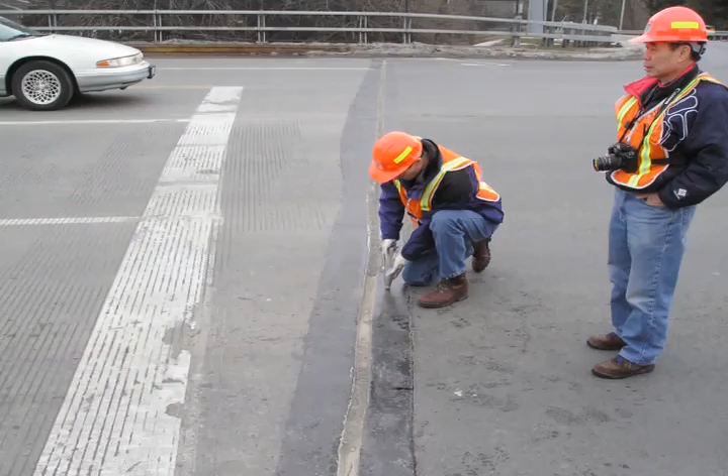Here we're conducting a test on a bridge in New York. The gentleman standing with me is Daniel Hsiao, also a BYU graduate, who is a senior project manager with the Utah Department of Transportation and also the director of the project, which I will share with you at the end of this presentation.

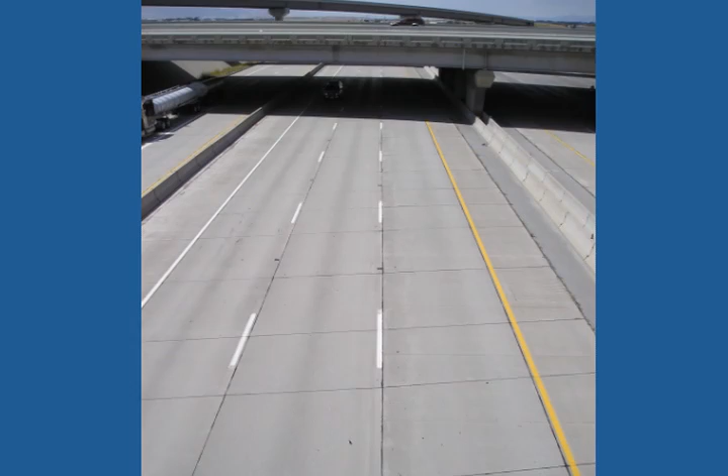Here's a picture of a typical bridge deck. The deck itself is about 8 inches in thickness, and it contains 2 mats, or layers of reinforcing steel, or rebar. Each mat is about 2.5 inches from the top and bottom of the bridge deck. Over time, bridge decks deteriorate. They deteriorate due to traffic factors, environmental effects, material property deficiencies, and other factors.

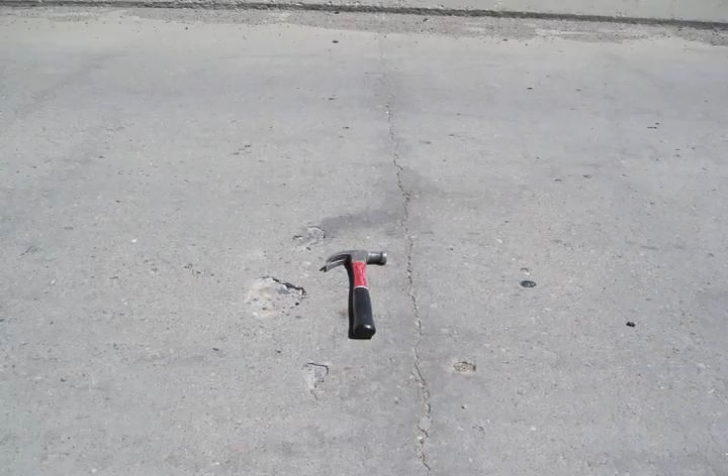Here's a picture of a typical distress, in fact, the most common type of distress that we see in bridge decks. This is a transverse crack adjacent to the hammer shown in the picture. This crack, like many types of distresses, can be seen with the naked eye. It can be measured and quantified and reported as part of a visual distress survey.

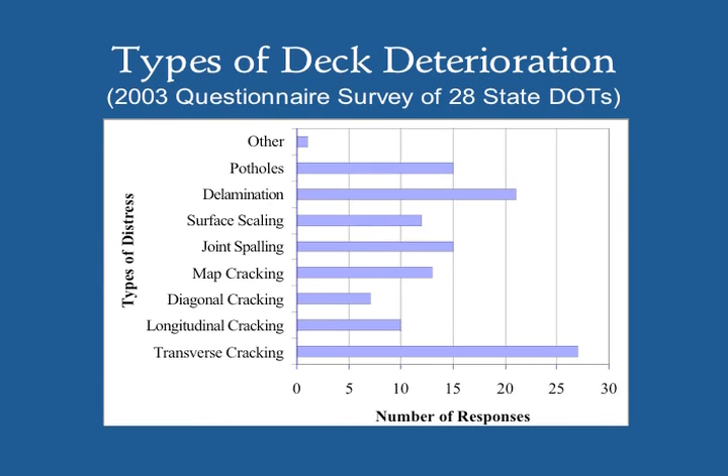Other types of distress common on bridge decks are shown in this slide, which is the result of a 2003 questionnaire that my previous student, John Hema, performed of 28 state departments of transportation across the northern tier of the United States. We see that, as I mentioned earlier, transverse cracking is most common, followed though by delamination.

Delamination is a type of distress not visible from the pavement surface. This is a subsurface detachment of the concrete just above the top reinforcing steel from the underlying concrete substrate below the reinforcing steel. Delamination, while it cannot be seen visually, can be detected using acoustical sounding, including chaining.

I'd like to show you a brief video clip that documents 3 different ways by which we can see delaminations. I'd like you in the video to pay particular attention to the areas which are hollow or sound dull. Those correspond with the delaminations.

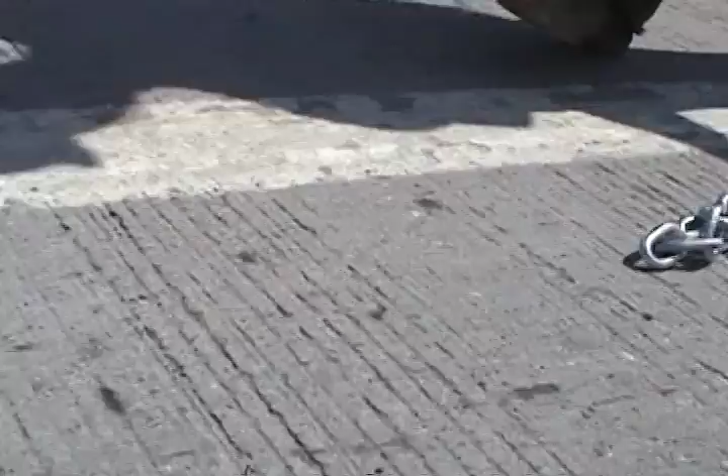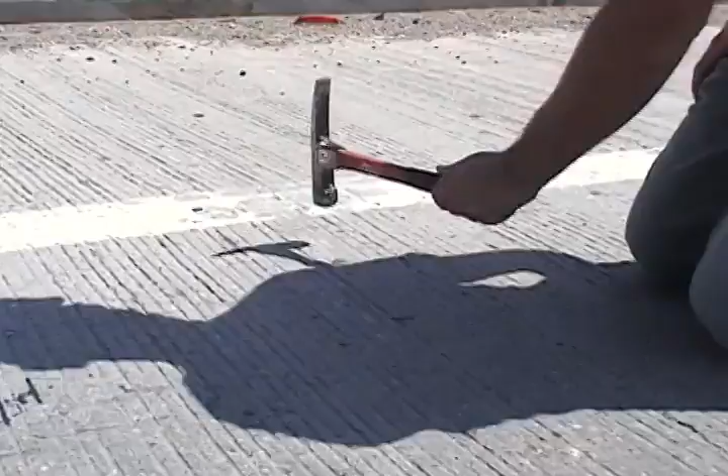Okay, another time. Ooh, that wasn't bad. Come back. One more time. Okay, again. That's pretty good. Yeah, real firm.

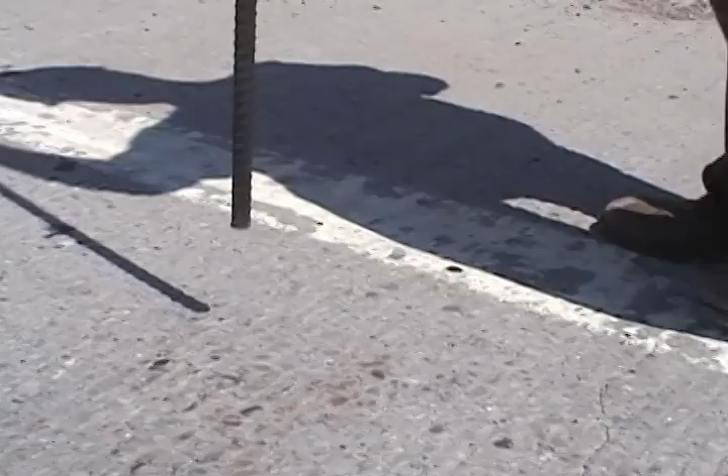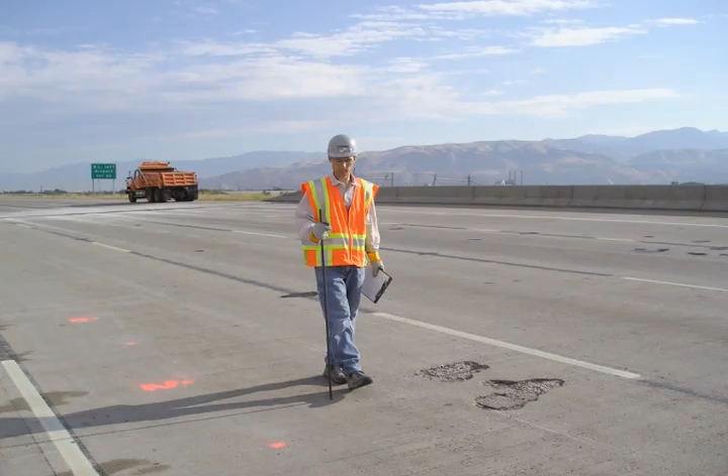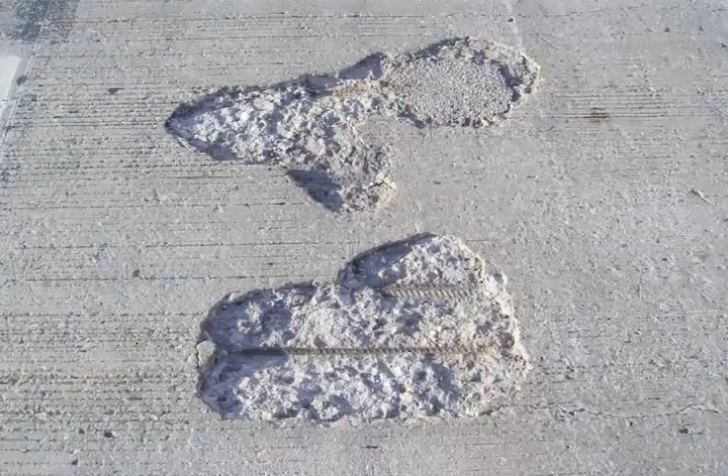Okay, come back. All right, could you hear the hollow sound as the chain especially was dragged across the surface of the concrete deck? Over time, those delaminations will manifest themselves at the surface through the occurrence of potholes, as shown on this bridge deck surface. As we zoom in, we can see clearly the top layer of reinforcing steel, or rebar, present in the bottom of the potholes. Over time, as the deterioration continues, these grow.

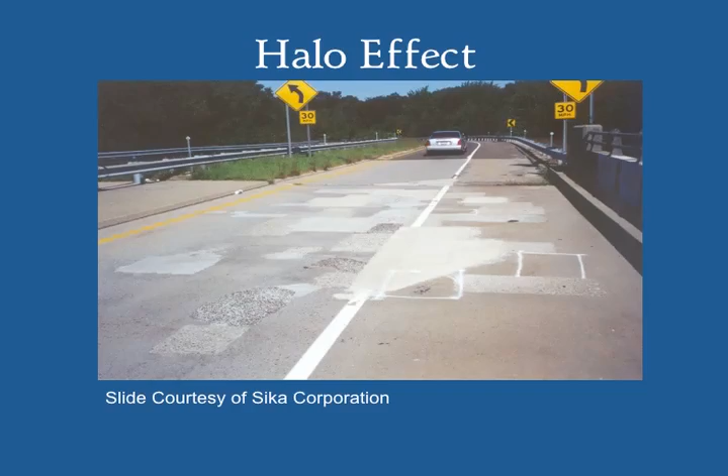This effect, this growing effect, is called the halo effect, and I'll speak more about it later in the presentation. As you can surmise, with increasing deterioration and increasing patchwork, the structural integrity of the deck is compromised. I'd like to share with you some condition data for Utah bridges in particular.

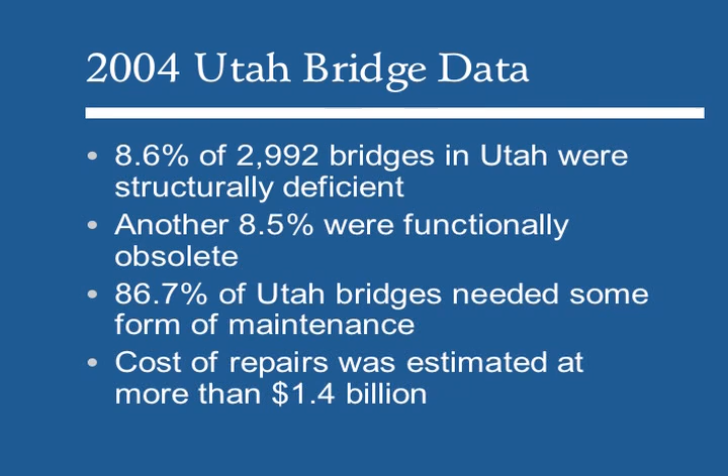In 2004, 8.6% of the nearly 3,000 bridges in Utah were structurally deficient. Another 8.5% were functionally obsolete. And nearly 90% of Utah bridges needed some form of maintenance. The cost of the repairs was estimated at more than $1.4 billion.

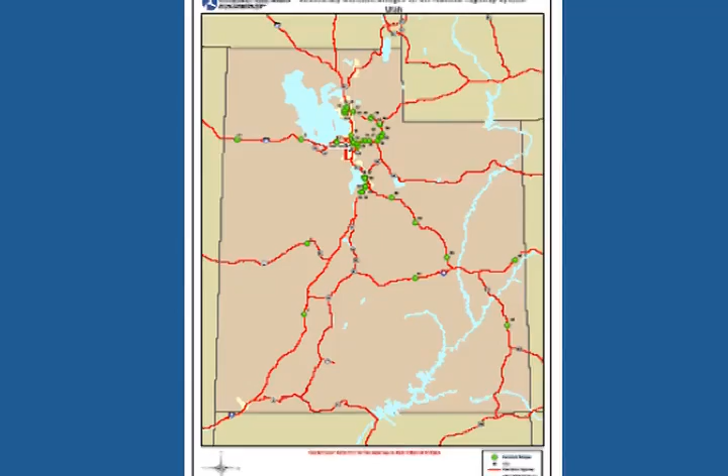Now, I suspect that some of you are interested to know the exact locations of these structurally deficient bridges. They are represented in this slide as the green dots across the state of Utah. Those are structurally deficient. State departments of transportation across the nation, like Utah, are facing this problem.

What, you might ask, is the root cause of the deterioration of concrete bridge decks in the northern tier, such as in the state of Utah? We asked this question in our questionnaire survey conducted in 2003, and we learned that salt-induced corrosion of reinforcing steel is the #1 leading cause of bridge deck deterioration. Answers in the other category were varied, but predominantly addressed construction aspects.

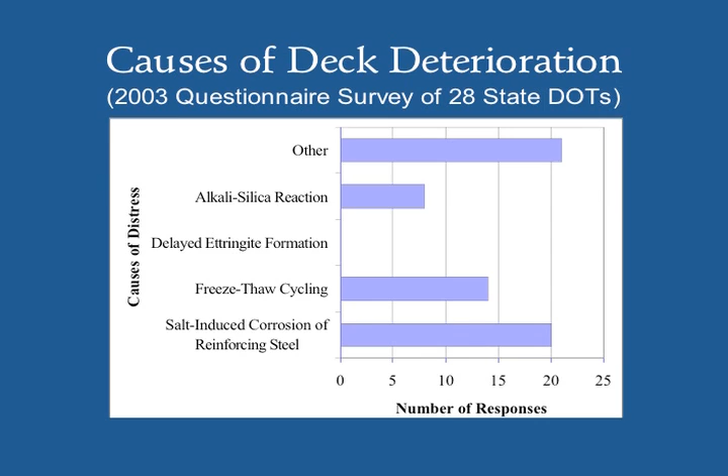Let's talk a little about salt and corrosion. Safety is the #1 parameter in all engineering aspects, and when drivers apply the brakes, they need to be able to stop. Because bridges are elevated structures, they cool from both the top and the bottom of the slab. Therefore, they can freeze rapidly compared to a pavement structure which is situated on the ground. Consequently, bridges have huge potential for severe icing problems.

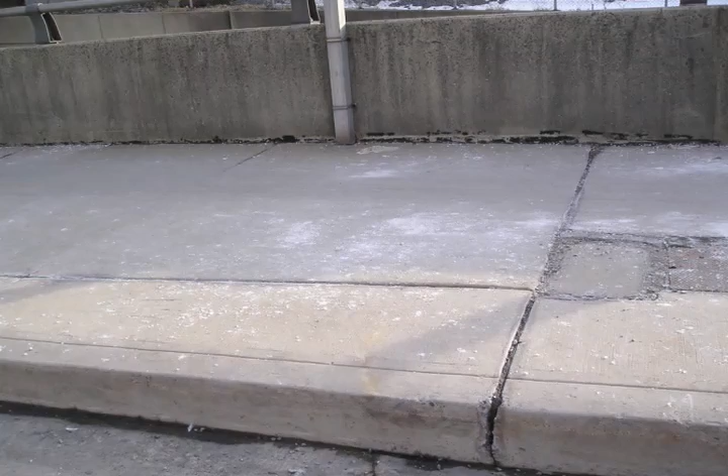To combat the otherwise slippery condition, departments of transportation routinely apply de-icing salts on our highway bridges and roadways to reduce the effect of icing. Here's a picture of the salt that's accumulated on a bridge in New York. And to give you some idea about our application rates in Utah, we apply about 250 pounds of salt per lane mile with each de-icing event.

So to put this in perspective, to treat the entire length of University Avenue here in Provo and Orem, we would need 15,000 pounds of de-icing salt with each event. Now, surely you must be asking, where does all of this salt end up? Well, some of it is splashed up onto our vehicles and carried other places. Some of it is caught in drains and outlet boxes on the bridges.

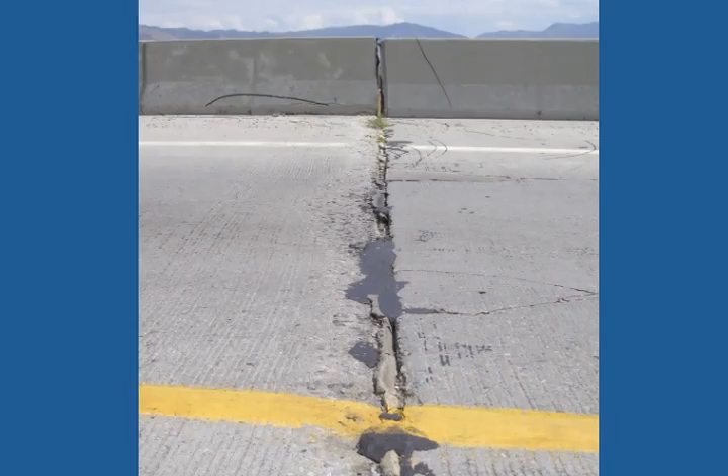Some of it, unfortunately, goes through leaky joints like this one, and the salt ends up corroding the substructure of the bridge. This is a local facility, by the way. And ultimately, some of it ends up in the concrete itself through a process called diffusion.

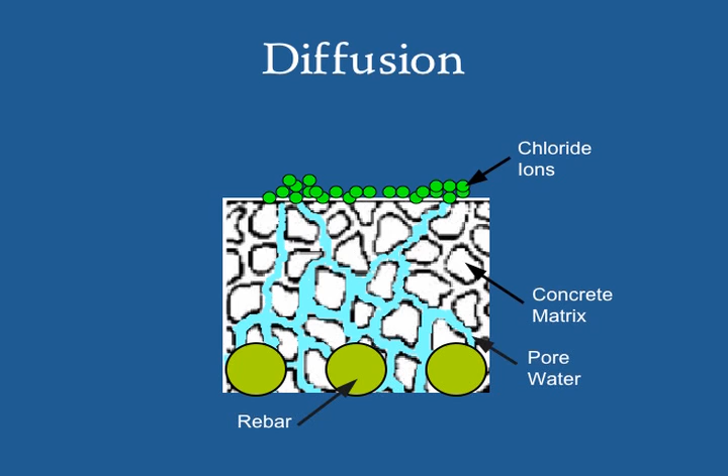Concrete has an internal void structure, which in most cases is at least 90% saturated. The concrete pore water provides a pathway for the chloride ions to enter the deck. As the ions approach the rebar, they can then cause corrosion of the reinforcing steel. Now, when the sodium chloride dissociates or dissolves in water, it produces a sodium ion and a chloride ion. The chloride ion is the one of greatest interest.

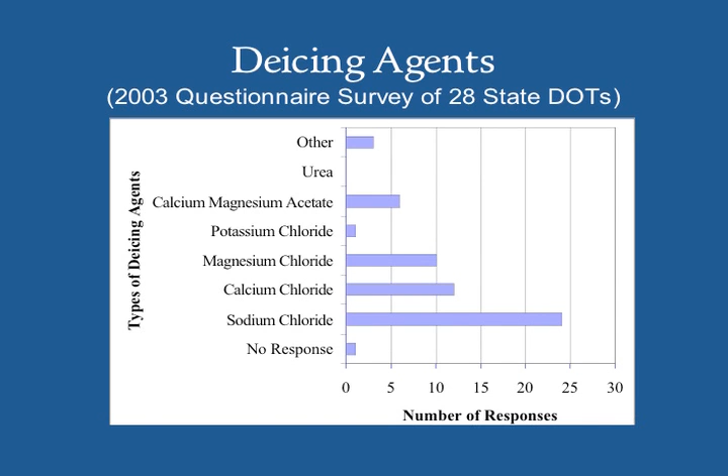I've shown you here the types of de-icing salts that are most commonly used. You see sodium chloride is by far the most common, and we have a huge abundance of this right near the Great Salt Lake in Utah. Other types of de-icing salts include potassium, magnesium, and calcium chlorides, all chloride-bearing. In some cases, calcium magnesium acetate is used. It's used especially in environmentally sensitive areas, but it is quite expensive. So we continue to use sodium chloride.

This schematic, courtesy of the Sika Corporation, gives us a picture of the 4 components of the corrosion circuit, namely a cathode and anode and electrolytic path, which is provided by the pore water, and a metallic path, which is the steel itself. As chloride concentrations increase around the rebar compared to other locations, that location becomes the anode, and that's where the actual corrosion occurs. Because rust itself is 500 to 700% larger in volume than the parent material, it produces a bursting stress within the concrete.

Concrete is not good in tension. In fact, its tensile strength is approximately 1/10 that of its compressive strength. And so cracking, initially horizontal cracking and then vertical cracking, occur quite readily, and then soon we have the birth of a pothole. Another consequence of rust is the reduction in the cross-sectional area of the steel, which ultimately leads to a reduction in the load-bearing capacity of the bridge deck.

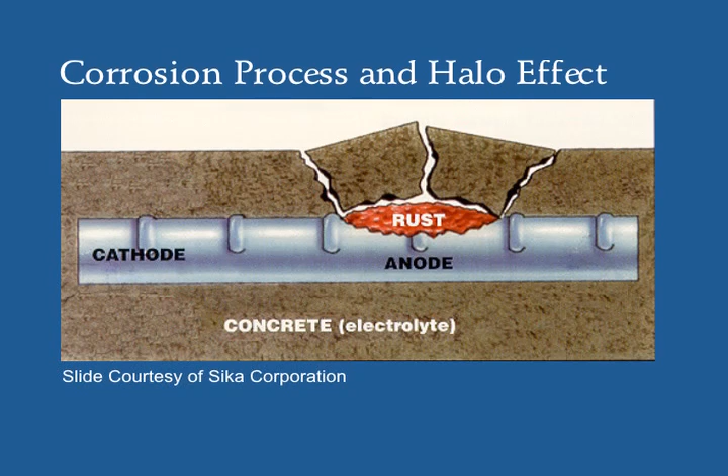After a while, the maintenance forces will come along and finally replace this deteriorated concrete. They'll replace it with chloride-free concrete in this patch, and then subsequently, this part of the system, previously the cathode, will become the anode, now having greater chloride concentrations than its adjacent steel. And now the corrosion process will be initiated at this location. Thus, you see how the halo effect occurs in the field, a continuous growing of this damage process.

Now, what can be done to stop this corrosion or to retard it? The first thing that DOTs have to consider that I'm going to share with you is increasing the cover depth. This typically ranges between 2 and 3 inches, although I've seen it as low as 1 on some bridges here in Utah. By increasing the thickness of the cover, even 1/2 inch, we can improve the service life of the deck up to an additional 6 years.

So, for example, increasing the thickness from 2 inches to 3 inches for decks similar to those that we tested will provide a 12-year increase in service life. We've simply delayed the arrival of chlorides at the level of the reinforcing steel. However, after that 12 years has elapsed, now the chlorides are again arriving in critical concentrations at the level of the steel. What can be done then?

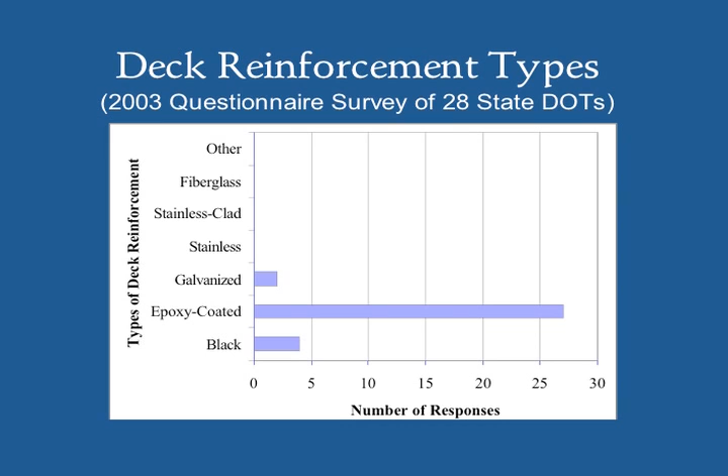To answer this question, let's talk about the type of reinforcement that's available. Again, these are results from the questionnaire survey of several state DOTs. You see that many DOTs use epoxy-coated rebar. This is commonly recognized by its green color. As long as the epoxy coating is intact, that is, no defects, no holes, no scrapes, the epoxy will prevent the chlorides from coming into direct contact with the steel and thus prevent corrosion altogether.

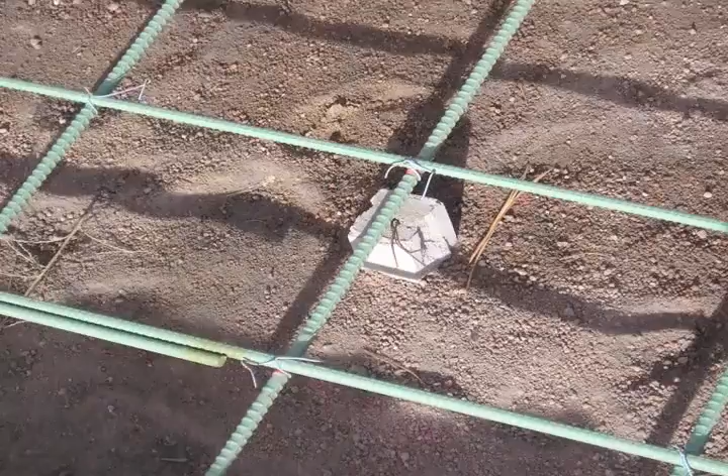However, for this to be successful, all parties involved with transportation, handling, and placement of this must be careful. And even with field cuts, such as is shown here, an epoxy compound patch must be applied to prevent localized corrosion at that location and ultimately shearing of the bar.

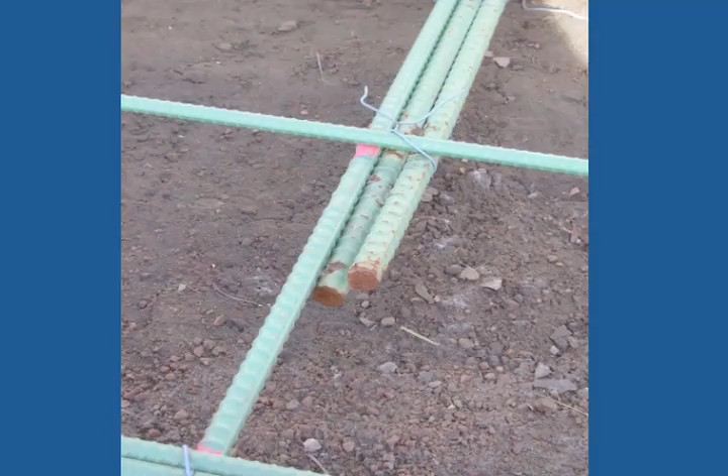Unfortunately, though, in too many cases, proper handling techniques are not utilized, and in fact, the ribs of the rebar are scraped. As the workers strike the tie wires down, they strike the epoxy coating of bars beneath, causing dings and other defects in the epoxy coating, and in many cases, the bar begins corroding even before the concrete is cast around it.

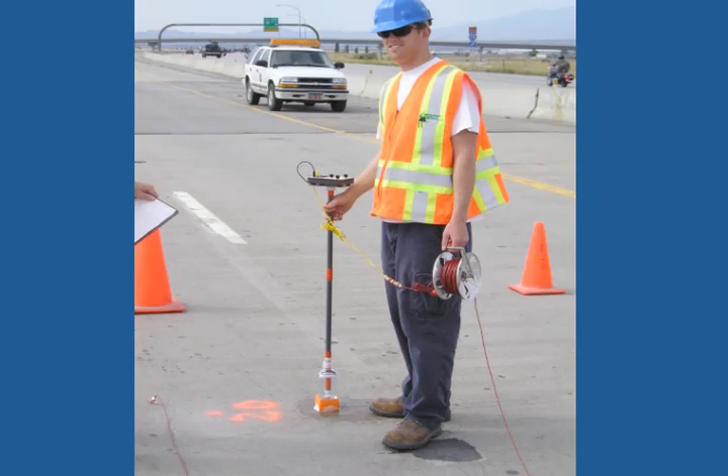In fact, in our field testing, we found that approximately half of the decks that we tested, which were known to have epoxy coatings, did not exhibit the properties of protection that we expected. In fact, they were as though no epoxy coating was present. This is unfortunate, but it emphasizes the importance of proper construction.

Bridges typically have a design life of 50 years, but a bridge will only last that long if it receives proper maintenance. One way UDOT hopes to extend the life of Utah's bridges is by applying an epoxy to the surface. This film is intended to document this preventative maintenance performed on the ramp connecting northbound I-15 to State Road 201 in September of 2004. This ramp was built during the I-15 expansion project just prior to the 2002 Winter Olympics.

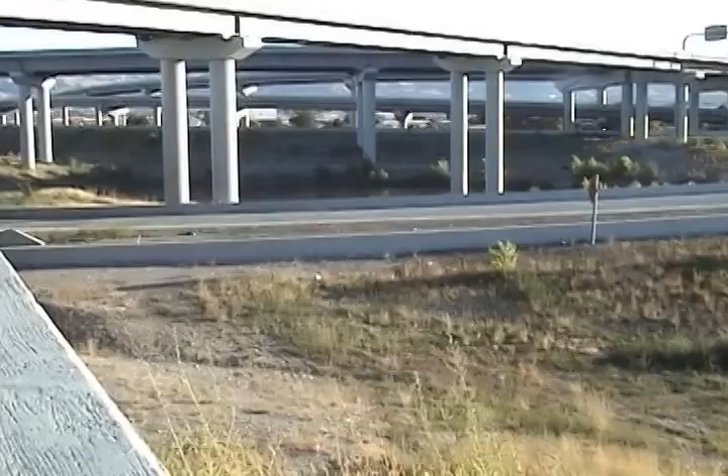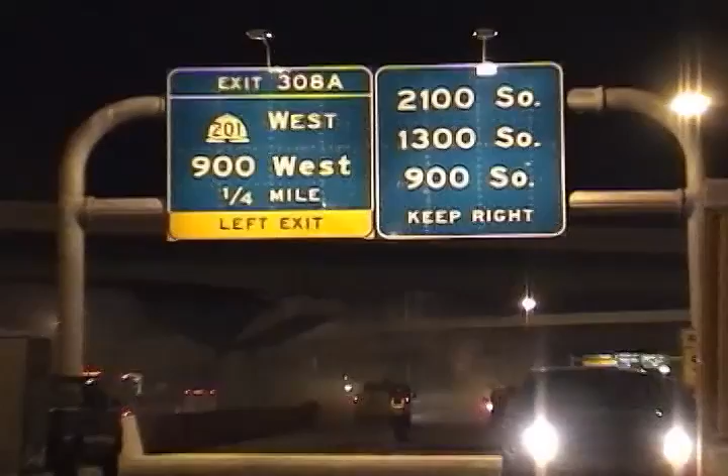For this project, Granite Construction is working with Polycarb Incorporated to apply 100,000 square feet of Flexogrid. Flexogrid is an epoxy-based polymer concrete designed to protect concrete from the damaging effects of traffic and especially de-icing salts. If salts are allowed to penetrate the bridge deck surface, they will cause corrosion of the reinforcing steel, which leads to bursting stresses and cracking as well as strength reduction.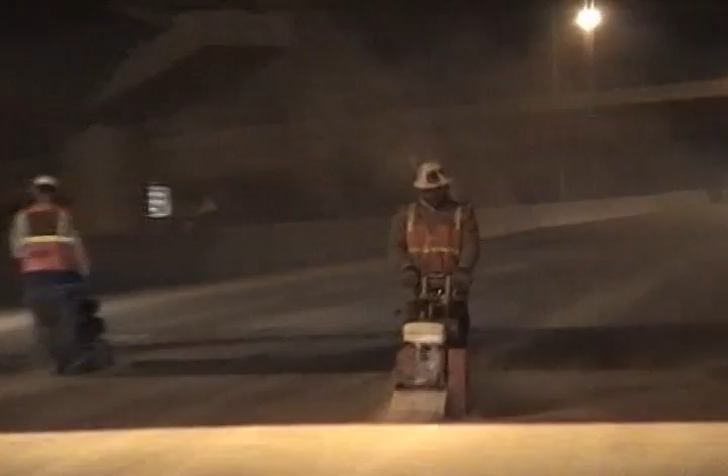Before any overlay materials can be placed, the surface must be prepared. The tremendous strength of the epoxy is wasted if it is bonded to a layer of paint, deteriorated concrete, loose debris, or any other substance that should have been removed prior to application. Failing to properly clean the surface contributes to the occurrence of delamination and blistering, which lead quickly to cracking.

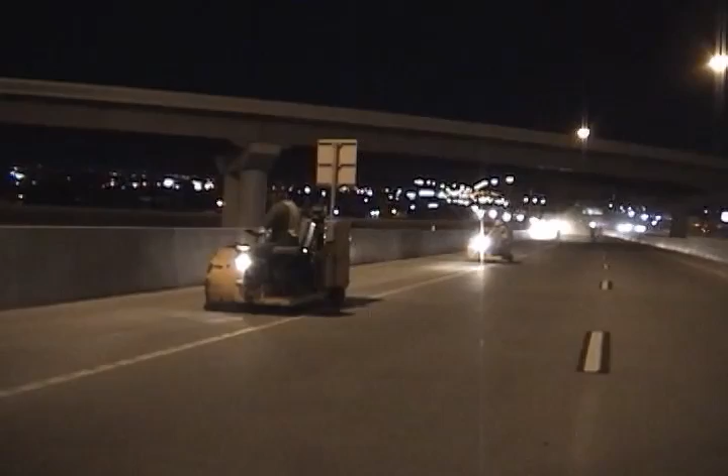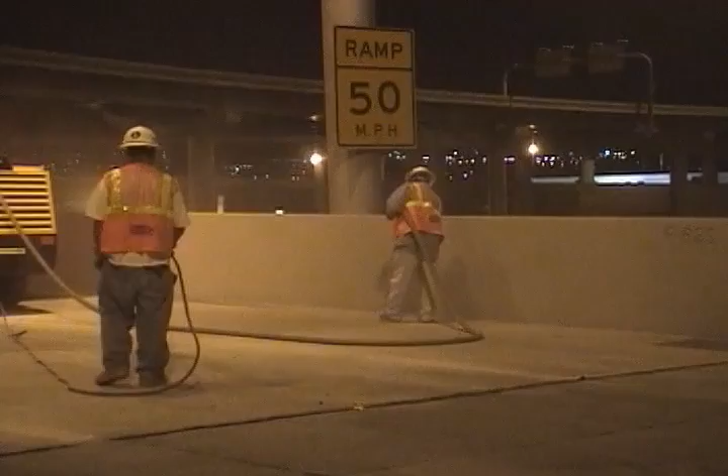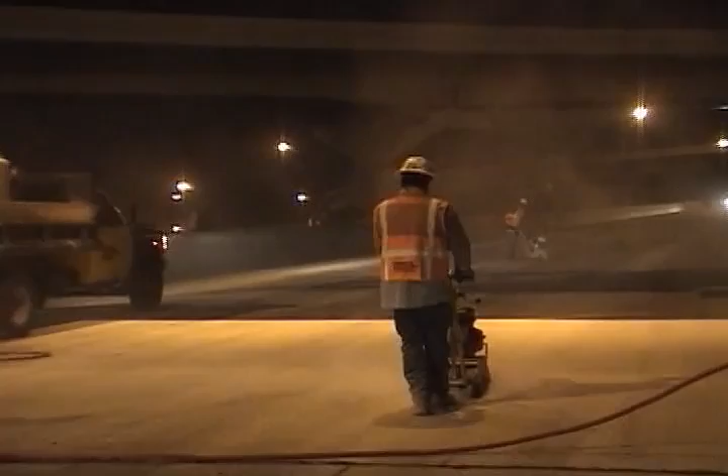The edges are inaccessible to the shot blasting machines, so handheld sandblasting hoses are used to clean these areas. Grinding machines are used to scrape the painted lines off the surface. Once all the blasting is complete, the deck will be cleaned with a vacuum truck to ensure no sandblasting grit or steel shot is left on the deck. Once the deck is cleaned, the drainage grates and expansion joints must be covered, or they will be filled with epoxy, potentially rendered unusable.

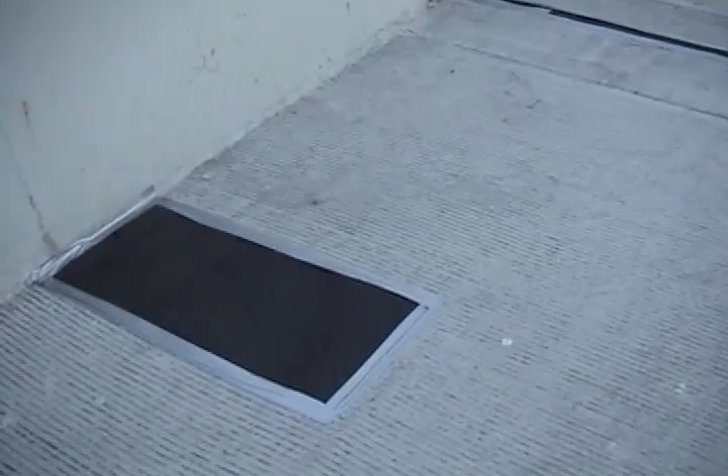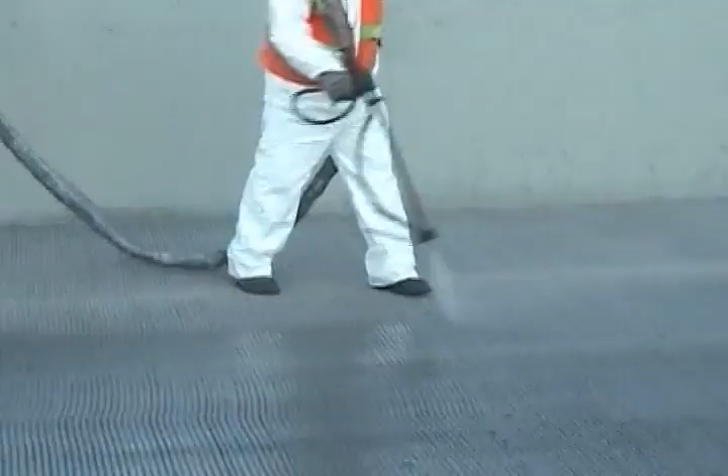The final stage of deck preparation entails the application of a low-viscosity methacrylate. This material is intended to penetrate and seal the small cracks that have formed in the concrete in the years since its construction. Once the cracks have been sealed, the deck is ready to receive the Flexogrid overlay.

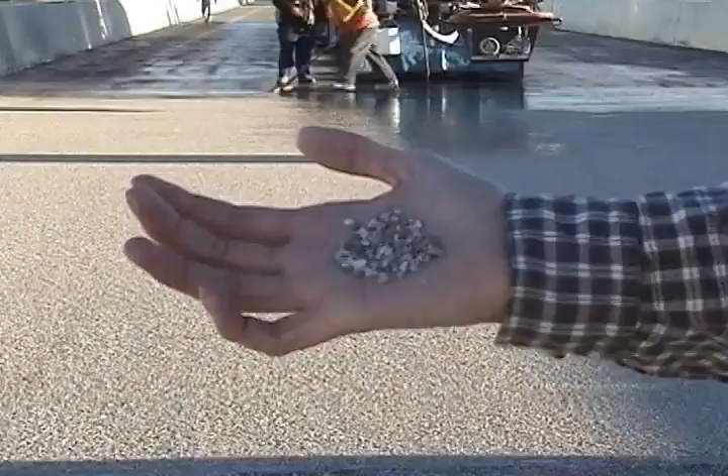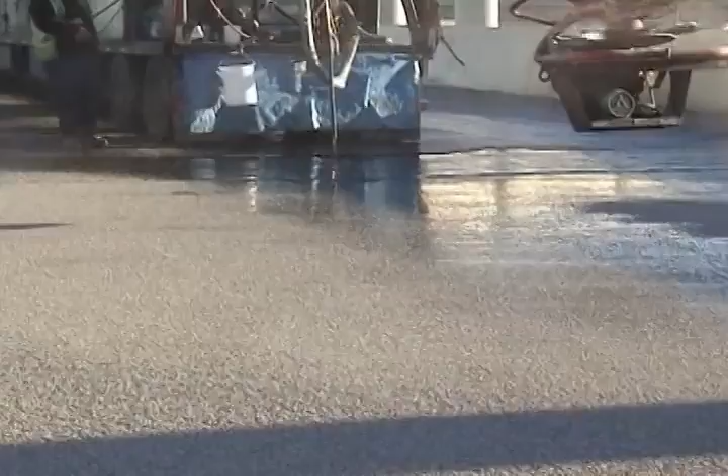The Flexogrid is automatically mixed in the Polycarb trailer and dispensed onto the deck surface at about 100 degrees Fahrenheit. Heating the epoxy greatly increases the speed at which it will cure. Once the Flexogrid binder hits the deck, it is immediately spread onto the deck surface using squeegees and showered with aggregates. When this layer of epoxy and aggregates has hardened, the loose material is removed and a second layer of binder and aggregates is applied. The two layers combined will have a thickness of around 5/8 of an inch.

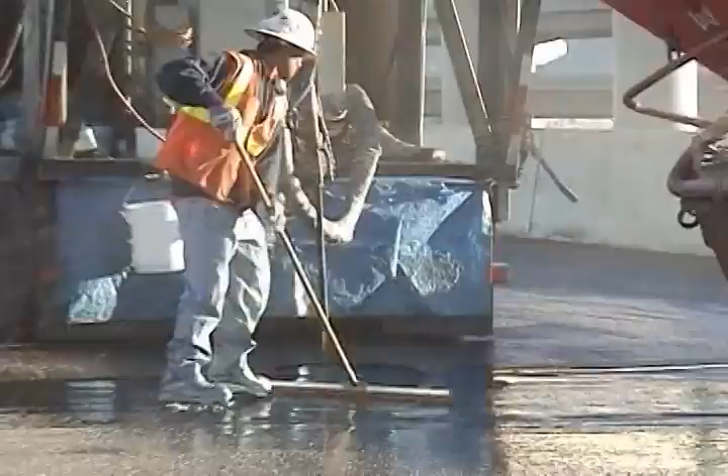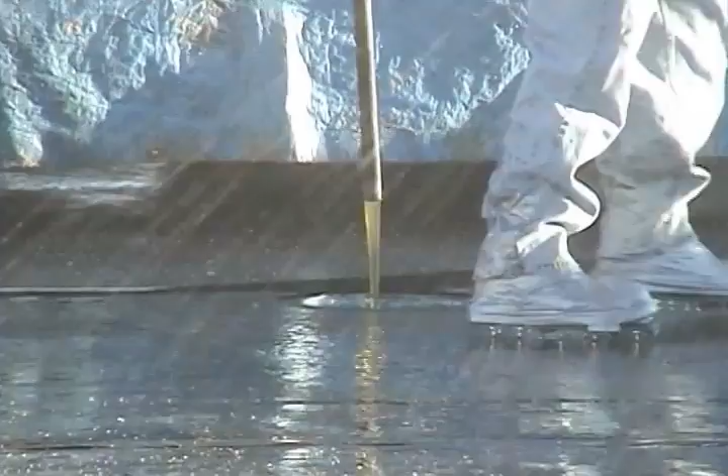Eric Wells of Granite Construction explains some of the reasoning behind choosing to overlay the deck with Flexogrid. Polymer concrete overlays can be installed and ready to receive traffic much faster than concrete overlays, and with much less additional dead load being added to the bridge. This fast turnaround reduces the amount of time the bridge must be closed and goes a long way to justify the increased cost of materials associated with polymer concrete. In this case, the cost was about $4.10 per square foot.

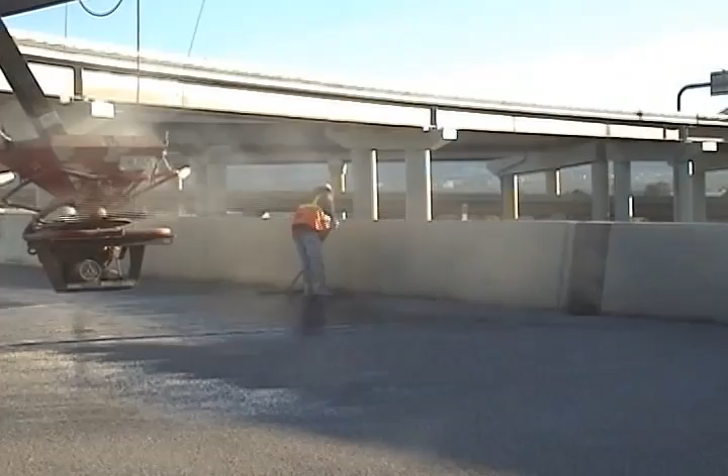To put this quick turnaround time in perspective, under favorable conditions, Flexogrid will cure in 4 hours, while a standard 2-inch concrete overlay takes 7 days to fully cure. Polycarb is the only company that Mr. Wells is aware of that uses a trailer to automatically mix and dispense the chemicals and aggregates used in the overlay. The same process performed by another company could take considerably more time, manpower, or both, because they involve using a trash can and drill to mix the polymer and bucket brigades to spread the material onto the deck. The heavy aggregates must then be carried out onto the bridge and dispersed by hand.

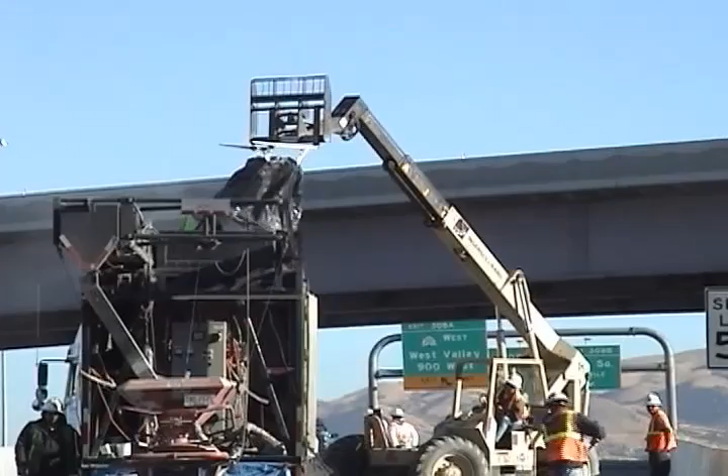Another benefit of using a trailer to carry materials is that reloading the trailer with aggregate is a fairly quick process. The aggregate is loaded into the trailer using a large forklift. Using the Polycarb wagon, 100,000 square feet of overlay can be applied to the deck, cure, and be open to traffic in less than 48 hours and can be expected to last in the neighborhood of 15 years with minimal maintenance. Mr. Wells also explained that in his experience, other overlay systems involving waterproofing rubberized membranes under a layer of asphalt can be expected to fail after 2 to 3 years of use.

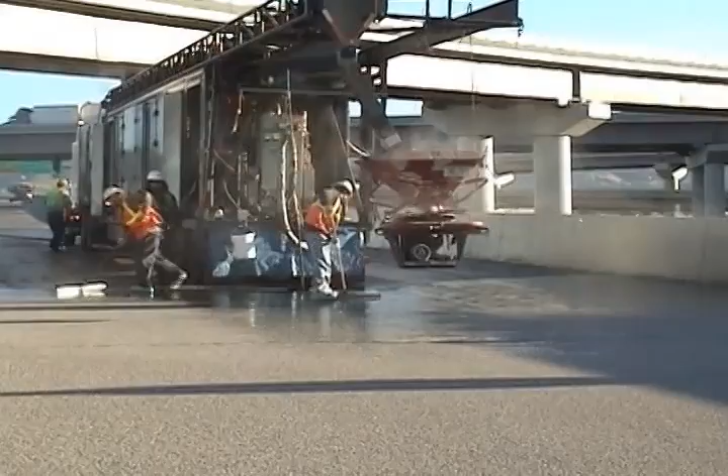Bruce Roeder, a chemical engineer for Polycarb, explained, in addition to most of the facts presented in this film, that this year alone Polycarb anticipates construction of 1 million square feet of overlay. This shot clearly contrasts a concrete pavement that has been overlaid with a concrete pavement that has not.

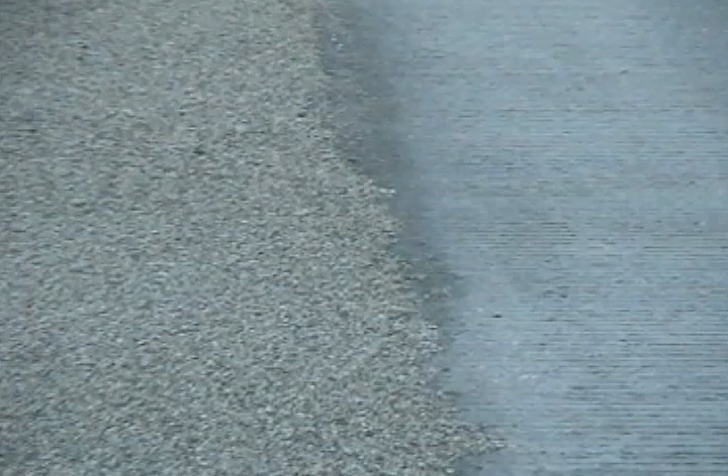Okay, from the video you learned that these surface treatments can last up to 15 years. In research that was performed by my student Amy Birdsall, we found that these surface treatments should be applied between 1 and 15 years after construction of the new deck. Otherwise, sufficient quantities of chlorides have already entered the deck, corrosion has already commenced, and the expenses associated with the epoxy overlay are of no value.

So, UDOT in particular has found great success in applying these within 1 year after new construction. By acting quickly, they dramatically reduce the exposure of these new decks to these aggressive chloride ions. Ultimately, though, unless the surface treatment is restored, replaced, or repaired, chloride ions will again begin entering the concrete. And when they do, ultimately the bridge deck will require some form of maintenance, rehabilitation, or replacement.

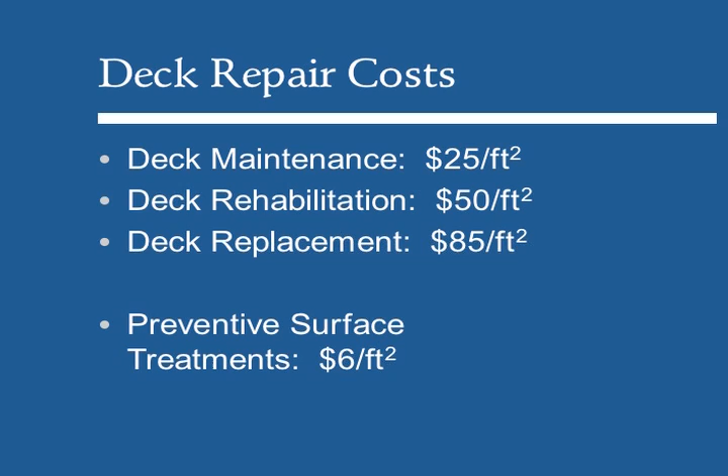These are costs associated with these activities here in the state of Utah. The cost for preventive surface treatments at $6 a square foot is only a fourth that of minor maintenance activities in the deck maintenance category. Notice again that those costs are a third to a fourth that associated with deck replacement. So an efficient bridge deck management program will focus on preventive maintenance.

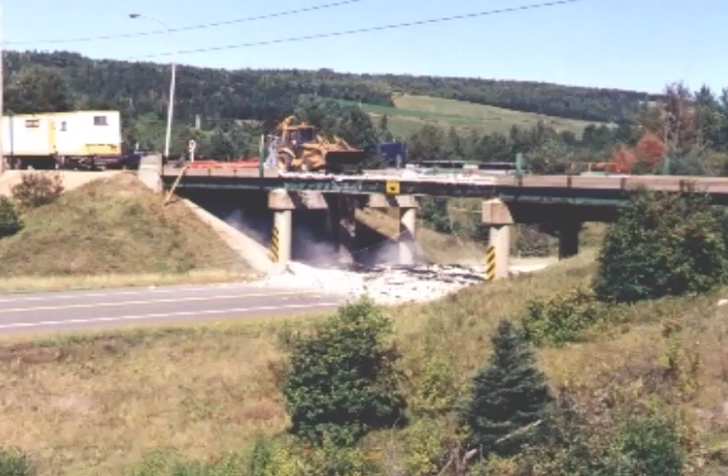Finally, when repairs are required, inevitably the bridges are closed. Not only does the agency repairing the bridge incur specific costs, but the public also incurs real costs. The drivers who would otherwise frequent these corridors must now drive in a delayed fashion down detours, consuming more fuel, spending more time, putting more miles on their vehicles. These things add up to real costs. We call them user costs, and a progressive-minded DOT will consider the amount of user costs when selecting a particular strategy for maintenance, rehabilitation, or replacement of a bridge deck.

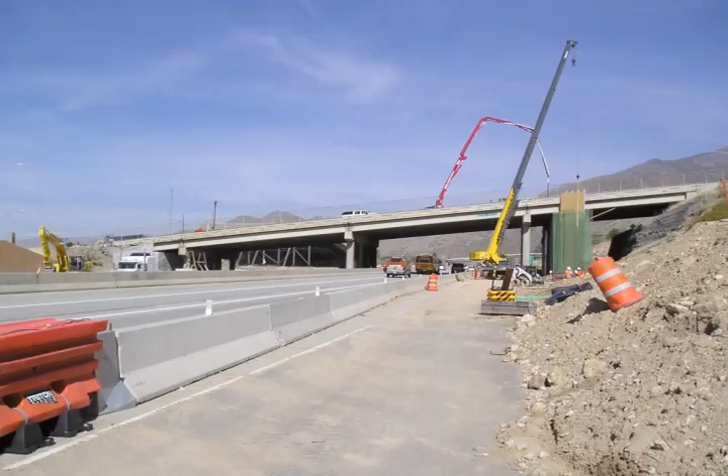I'd like to share with you a particular project where UDOT decided to pay a little bit more money up front to nearly completely eliminate the user costs associated with this project. This is 4500 South on I-215 East in Salt Lake City. This bridge will be removed and replaced this weekend. That's right, ladies and gentlemen. In 2 days, this bridge will be removed and a brand new bridge deck will be installed in its place using accelerated bridge construction technologies.

Traditionally, construction would require between 5 and 9 months. During that period of time, the bridge deck would be closed. The frontage roads that face the bridge would be affected. Traffic in the whole region would be adversely affected. You might ask, what is the user cost associated with this particular intersection? UDOT engineers computed it to be $33,500 per day, which is about $1 million per month. So, I'd like now to show you another video describing how the use of accelerated bridge construction saved us, the public, between $5 and $9 million on this project.

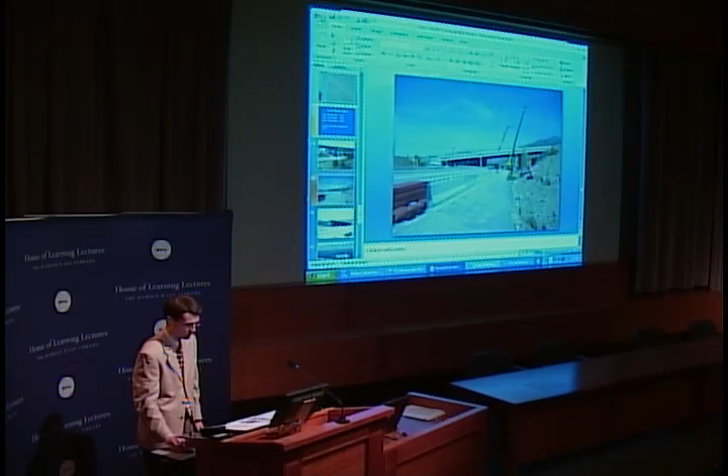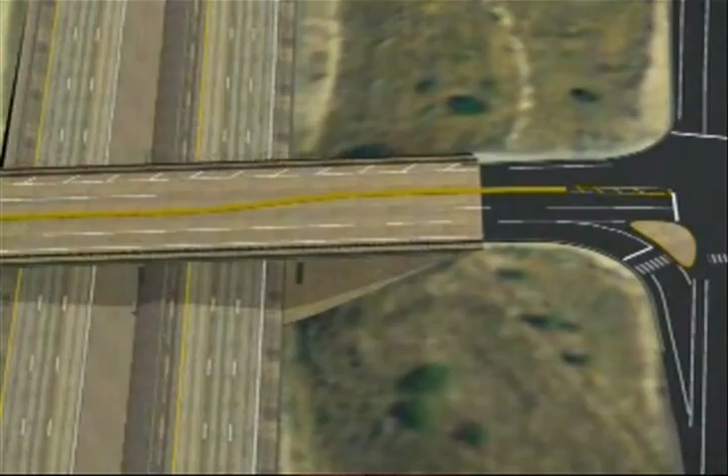Nestled in the scenic Wasatch Front, the 4500 South Bridge over I-215 East is being replaced using an innovative process called Accelerated Bridge Construction, or ABC, which allows for the building of a new bridge in a staging area until it is moved into place. The existing bridge is old and is being replaced with a single-span bridge that is the same size as the current one. Vehicles will continue to use 4500 South and I-215 while the new bridge and abutments are being built. The abutments, as seen from 215, will contain artistic reliefs, helping the new structure to blend in with its picturesque surroundings. During excavation, soil nail walls are used to stabilize the west and east sides while traffic moves overhead.

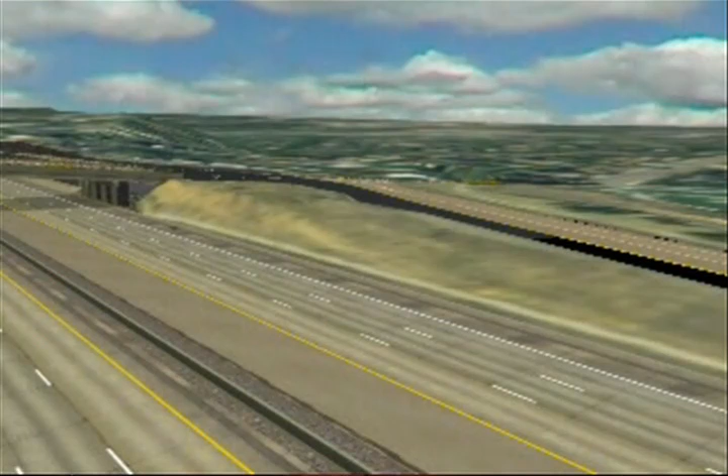The staging area is located between the interstate and the southbound off-ramp to 4500 South in what is known as the Ramp Gore area. The lower portion is graded to match the elevation of the southbound I-215 roadway, and the higher portion matches the elevation of northbound I-215. Temporary abutments are erected to allow construction of the superstructure, which is the primary support for the new bridge. Steel plate girders are laid across the temporary abutments, and then a cast-in-place deck is placed on the girders, along with integral end diaphragms. The completed 5-lane bridge weighs 3 million pounds, is 172 feet long, and rests on a 12% slope.

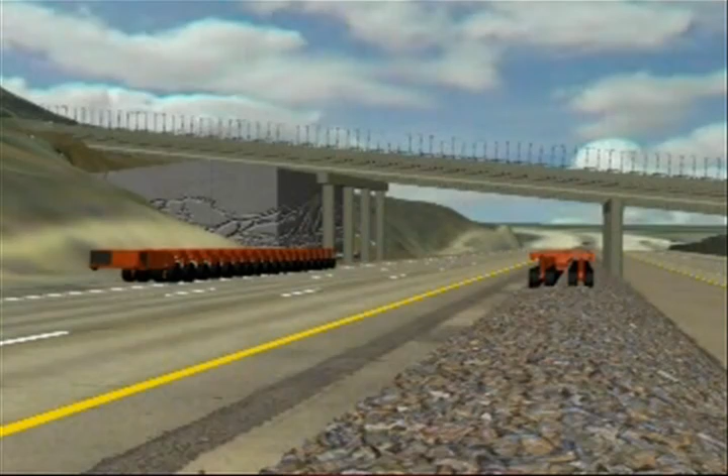A self-leveling trailer with multiple axles and wheels called a self-propelled modular transporter, or SPMT, is used to remove the old spans and move in the new one. Freight containers fill the gap between the trailer and the bridge bottom. The SPMT is controlled by remote control as the operator walks along with the trailer. Once under the northbound deck, the operator backs the SPMT out and carries the span to a demolition area. The special demolition area is located just beyond the staging area, and all demolition work will be done after the new bridge is in place and traffic is flowing again.

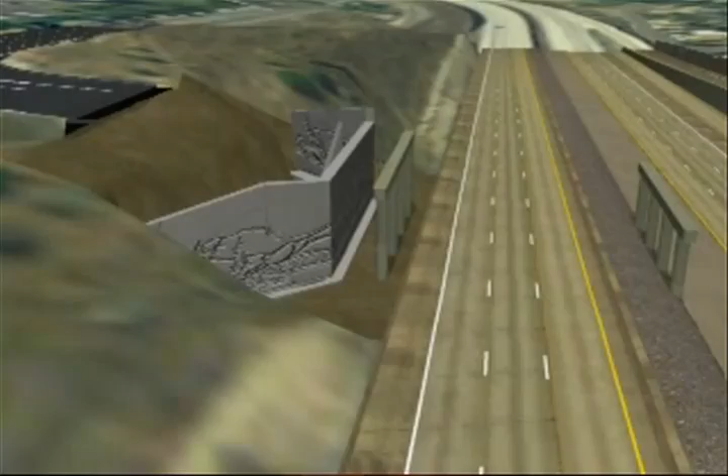The SPMT operator follows the same procedure for the southbound span across I-215, removing the deck and carting it off to the demolition area. The next step is to remove the rest of the old bridge and the bents. During this conventional demolition, extra care is taken to avoid damage to the new abutments on both the west and east sides. The final step before bringing in the new span is to remove the existing columns that supported the

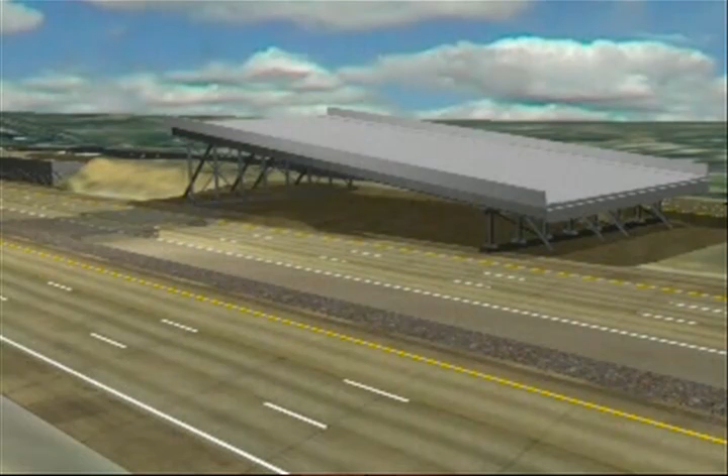old bridge. In the staging area, near where the new span sits, a temporary ramp is set up to allow the SPMT trailers on the high portion of the staging area to travel onto the northbound roadway. The SPMTs are moved into position under the new span, and the bridge is lifted off of the temporary abutments. Jacks tilt the bridge to a 4% tilt to compensate for the 4% grade of the I-215 roadway. This allows the bridge to be level as the SPMTs travel downhill toward the new abutments.

The bridge span is backed out onto the interstate while the ramp is removed so that the SPMTs can pass, and then the bridge is moved into place and set down on the new abutments. I-215 under 4500 South will be closed and reopened to traffic after one weekend. Traditional methods would have resulted in traffic impacts for 9 months.

4500 South remains closed for approximately 10 days, while the abutments are backfilled and precast concrete bridge approach panels are put in place. An asphalt roadway, barrier, curb and gutter, and sidewalks are tied into the bridge. The next steps include a polymer overlay of the deck and lane striping. Once those tasks are complete, traffic is flowing freely again on 4500 South and I-215.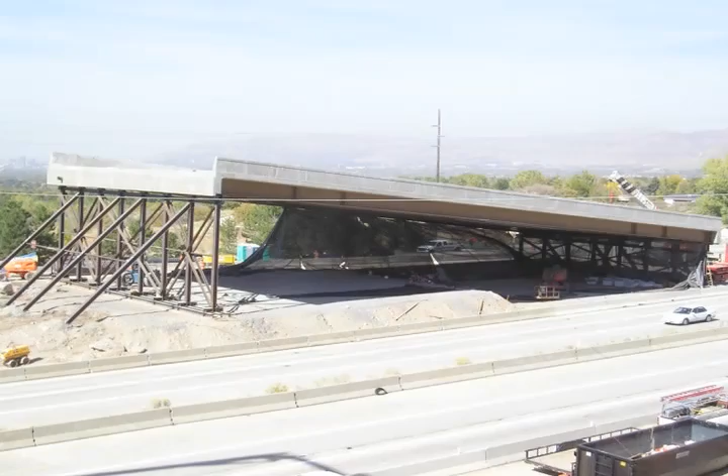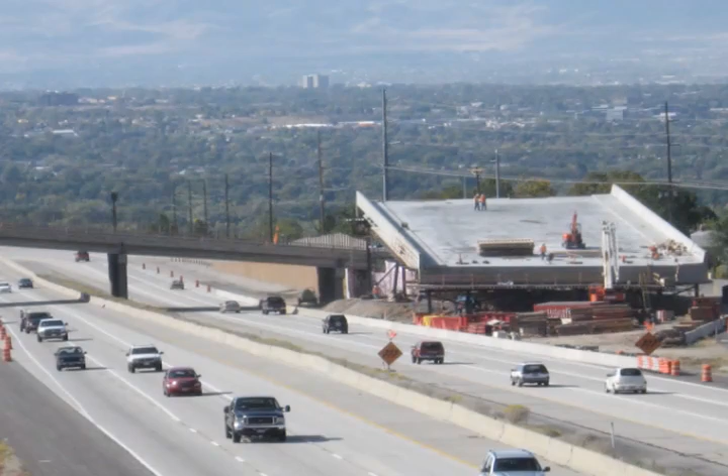Here's a picture of the actual deck right now waiting to be moved from its current location to its final resting place, and another shot of it looking from the north. I acknowledge Daniel Shao, who I mentioned earlier, for sharing this picture and also the video that I just showed you. You might be interested to know what is the cost associated with the rental of those self-propelled modular transporters.

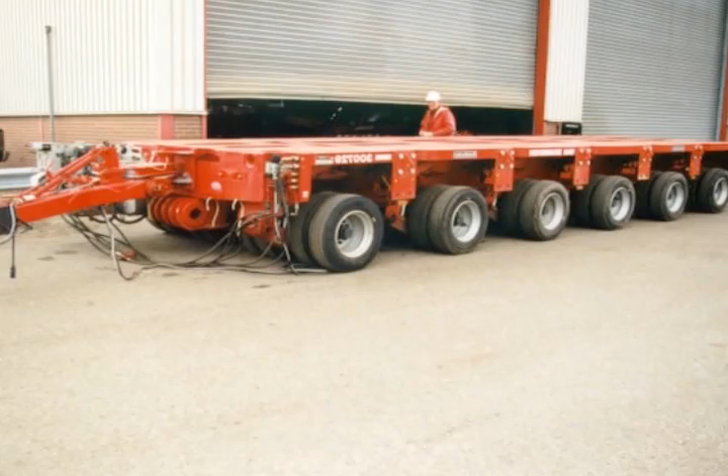The contracted rental price for this project, for these mobile units, is $880,000, less than 1 month of user delay costs that would otherwise be associated with this project. I think we should applaud UDOT for their innovation in this respect.

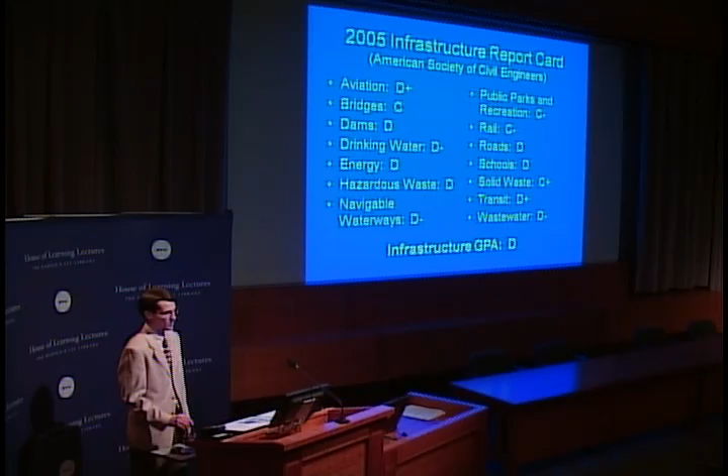Well, I have focused my presentation on just one aspect, one element of our national infrastructure. It is deteriorating. In 2005, the American Society of Civil Engineers produced a report card, which has received significant publicity. As you can see, bridges received a grade of C. A C is not a good grade, yet it is the second highest grade given to any element of our infrastructure, second only to solid waste.

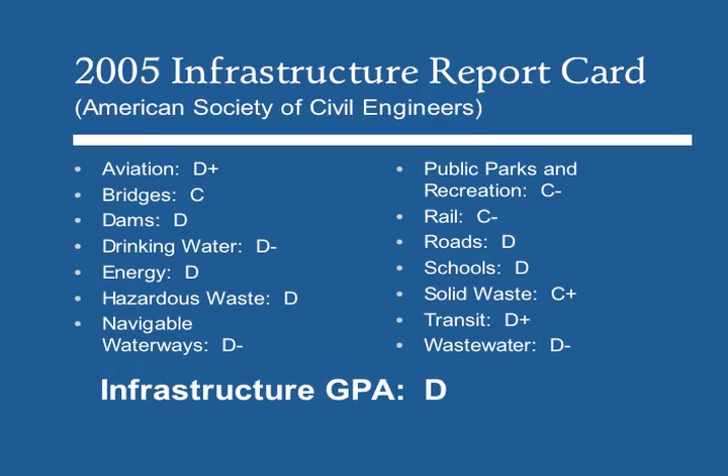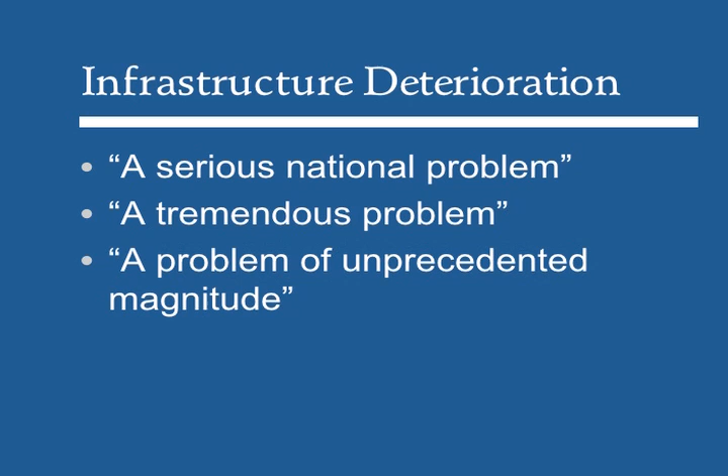What is the average grade of our infrastructure? The GPA given by ASCE is a D. This corresponds to poor. The next lowest grade would be an F, failing, inadequate to meet the needs. Because of the widespread deterioration that we're facing, this has been called a serious national problem, a tremendous problem, even a problem of unprecedented magnitude. And ASCE estimates that $1.6 trillion is needed over a 5-year period to bring all elements of our nation's infrastructure to a good condition, or a B grade.